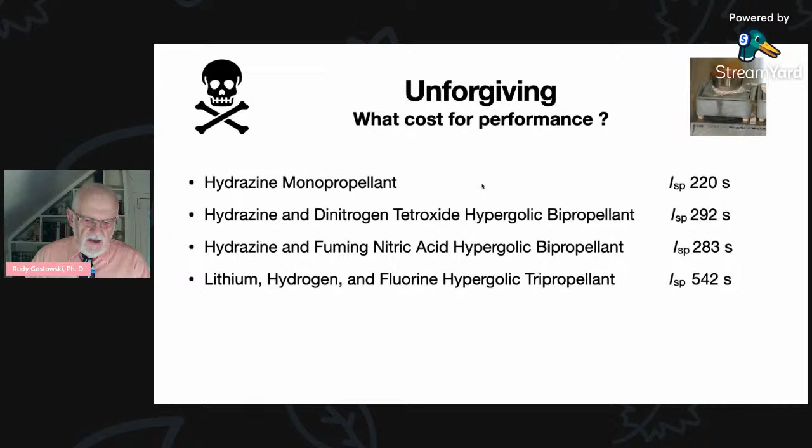So if we're just thinking about that performance number, we'll neglect these other things. And so that's why I'm talking about this today. So we have to make trade-offs in any selection. We have to do a trade study. We cannot have it all.

And in spite of one of the NASA administrators from, I don't know, four or five administrators back, who said we could do everything at the same time. We could be faster, we could be cheaper, we could have higher performance, all at the same time, but it's impossible. And the man, he was an engineer, and he knew better. It was politically expedient to say something like that.

So if you're going to have performance, you're going to impact your handling safety, your environmental impact. If we consider the environmental impact, we may have to accept a lower performance. We cannot have all of these. There will be a trade study, a trade-off.

So what's the holy grail of green propellants? Well, we would say, okay, it's hydrogen and oxygen. We're producing water. How much more innocuous could it be to make water? And we get a fabulous ISP, actually the highest ISP that we've actually used, of 450 seconds. However, liquid hydrogen and liquid oxygen have their own challenges. They are not as dense as we would like. They're cryogenic, and they give us tremendous technical challenges. They combust at a very high temperature.

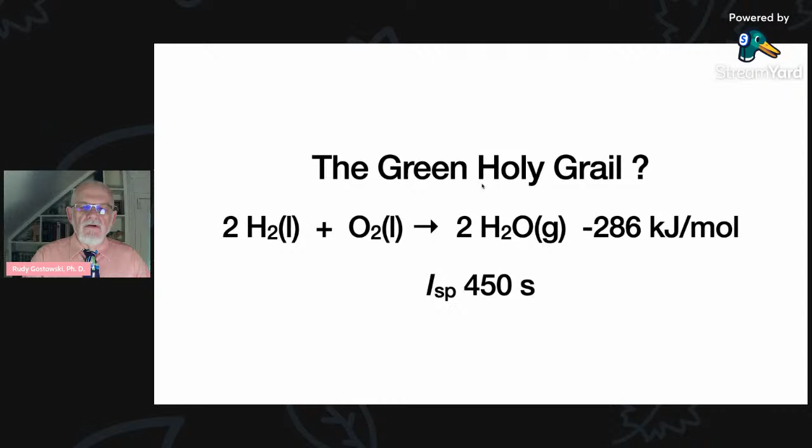And I'm also going to talk about what I'm going to call pseudo-green propellants. These are not really green. They are going to pollute. They do not have the handling considerations of some of these things, such as hydrazine and dinitrogen tetroxide, but they do pollute. So I'll call that pseudo-green. It's not really green, but we're going to still talk about that. Or to have a quote here, you must break a few eggs to make an omelet. We're going to have to do some things to get a certain amount of performance.

So what are our options? Well, here's a list that I put together. I'm sure that I have omitted something. I'm sure those will come up in the questions, and maybe I'll have an answer. I don't know. Hydrogen peroxide as a monopropellant does not perform real well, but it has been used in many vehicles, and we'll see that a little bit later on. But it only has an ISP of 117 seconds. So it's a low performer.

Nitrous oxide is a better performer, but unfortunately many people think that it's totally safe, that you can do anything you want with it. In fact, automobile or motorcycle enthusiasts will install a nitrous oxide tank in their vehicle, hide it away, have a secret switch. They turn the switch on, and all of a sudden their engine's performance is doubled. Of course, it's probably going to destroy the engine eventually, but it will increase their performance momentarily. The hobby rocketry people use nitrous oxide, but there are some possible dangers when you scale up.

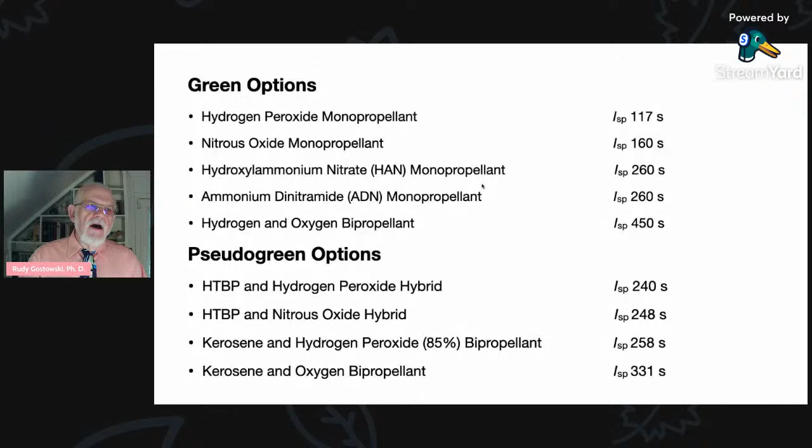SpaceShipTwo uses nitrous oxide, and they had a major accident when they were doing some ground testing, and it was partly that the technicians were not following the safety protocol, and the engineers had not considered the consequences of their design. And we were involved in that investigation. I probably should say no more at the risk of being sued by Sir Branson.

Another green option would be the HAN monopropellant, hydroxylammonium nitrate, and it has a great ISP at 260 because it's essentially a bipropellant that's together. And the problem that we're going to get into there, and also with the ADN monopropellant, ammonium dinitramide, I'm sorry, I'm butchering my organic chemistry this morning.

The problem with either of these is that they combust at a very high temperature, and a catalyst is required for their ignition. And it's very difficult, very challenging to find a catalyst support that can sustain that high temperature for any time. And that was something I was working on for these propellants when I was at NASA. And we weren't getting a whole lot of traction in doing that. It's difficult. And then the hydrogen oxygen bipropellant, you know, the holy grail of green propellants.

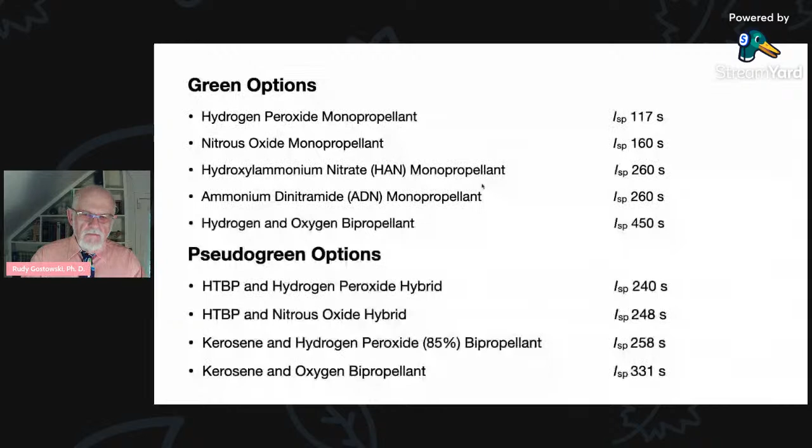So I'm going to spend most of my time, in fact, I'm really going to spend the bulk of my time now that's remaining, talking about hydrogen peroxide, because that's what I've had the most personal experience with, and that's what I think is a good place to go for people like yourselves that are wanting to have a sounding rocket, for us that want to have a sounding rocket. I think it's a practical way to go.

I believe it is attainable for us to build a hydrogen peroxide with kerosene bipropellant engine, maybe starting like what we're doing with a hydrogen peroxide thruster and gradually working our way into it, because it's a challenge to even make the thruster. We have to do that correctly.

Some relevant characteristics of hydrogen peroxide: it decomposes to oxygen and water, so it's not going to have any environmental impact, and it's not going to be toxic to the people that are handling it once it's decomposed. Now, you certainly do not want to drink hydrogen peroxide. You know, that would certainly kill you. And it does have some handling considerations that we'll talk about a little bit later on.

But in that decomposition, it's exothermic by 196 kilojoules per mole. And we can accelerate the rate at which hydrogen peroxide decomposes with different things such as metals, elevated temperature. So once we get something started, it's going to be self-sustaining because of the heat. In fact, that becomes a concern because of heat soak back into the piping to the engine. It could cause a problem at a valve or at a tank that's

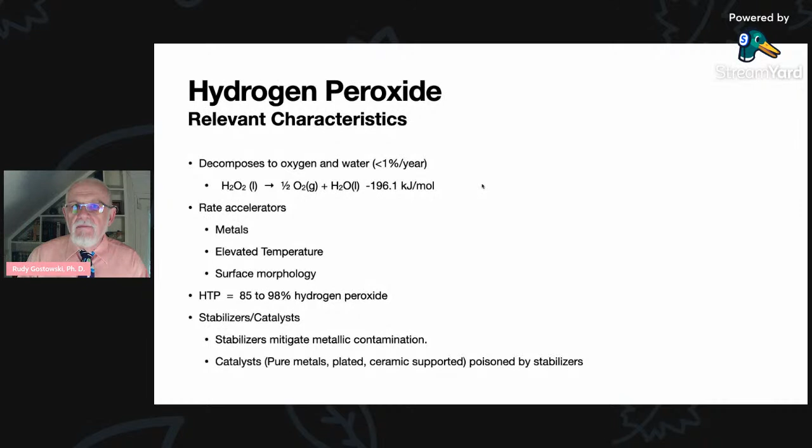The advantages of peroxide: safer handling, much safer. We don't have a cryogen. We don't have to be concerned about having a frostbite burn to our hands if we were to pour it on us. There's no cryogenic requirements. You don't have to worry about boil off. The decomposition products are totally safe. You can have a smaller vehicle because of a lean burn mixture. You have cooler combustion than many combinations. Hybrid engines are more stable with peroxide than using LOX, and it's pretty cheap.

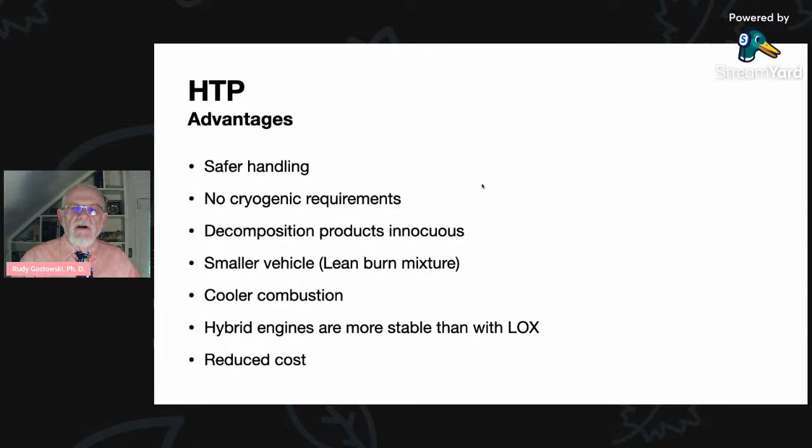You know, you can buy peroxide at a 35% concentration level, and then you can increase its concentration by removing the water. It's not a difficult thing to do. It's dangerous, but it's not difficult to do.

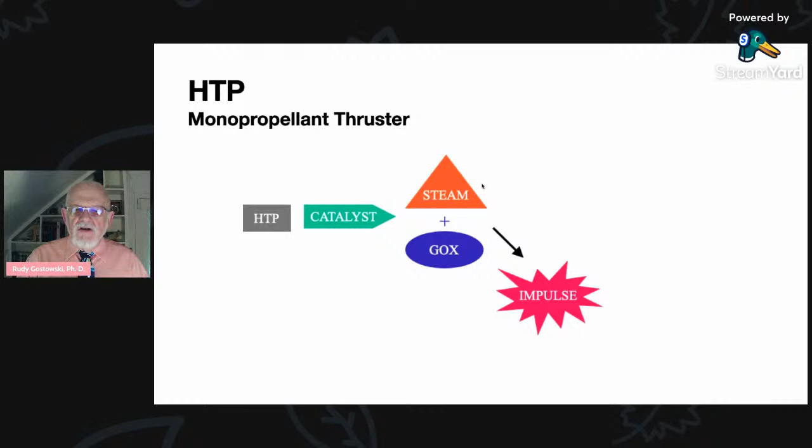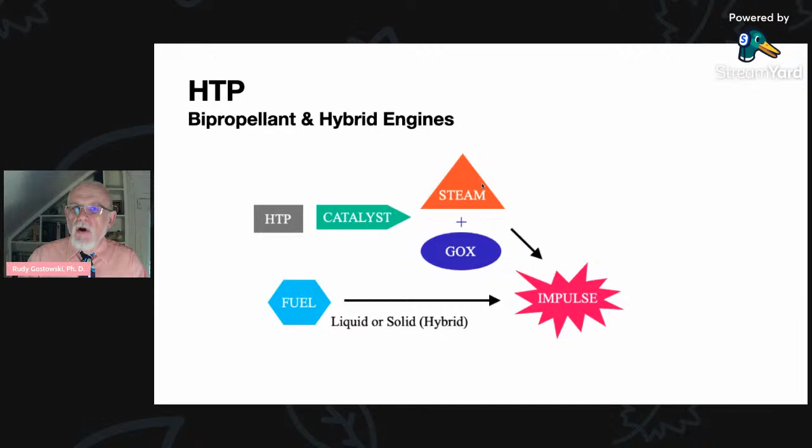So some of the applications of peroxide: we've already talked about the monopropellant thruster, where the peroxide encounters a catalyst, producing steam and gaseous oxygen and giving you your impulse for your rocket. Or you have a bipropellant or a hybrid mode where we're using the gaseous oxygen to burn with a fuel. That fuel could be a liquid or it could be a solid in the case of a hybrid. And the steam can actually cause the combustion event to occur if we have a flame holder present in our engine.

So it's a heritage propellant, meaning it's been used many times. It was the initial liquid propellant. It was what was used by von Braun in Germany.

So it was used in the X-1, the X-15, in their reaction control systems, the Mercury capsule, Soyuz capsule, Progress, all these different rockets and capsules and rocket planes used it to control the attitude of the rocket plane or whatever it was. It was used as a liquid bipropellant in the British Black Knight project, the AR-2, the LR-40,

that was in Russia. It's been used in hybrid. There was a large hybrid rocket using peroxide by General Electric. It's been used to run turbopumps in the V2 and other rockets. It's been used in torpedoes, submarines, the JATO pack that we attach to an aircraft so that it could take off on a short runway.

What I'm going to talk about now is the X-37 project. I was involved in X-37. Besides my work with the shuttle boosters, my other major project for NASA in the beginning was the X-37. And we worked on that for several years.

Excuse me, I'm going to grab a drink real quick. If you want me to talk about roasting coffee, I can do that sometime too.

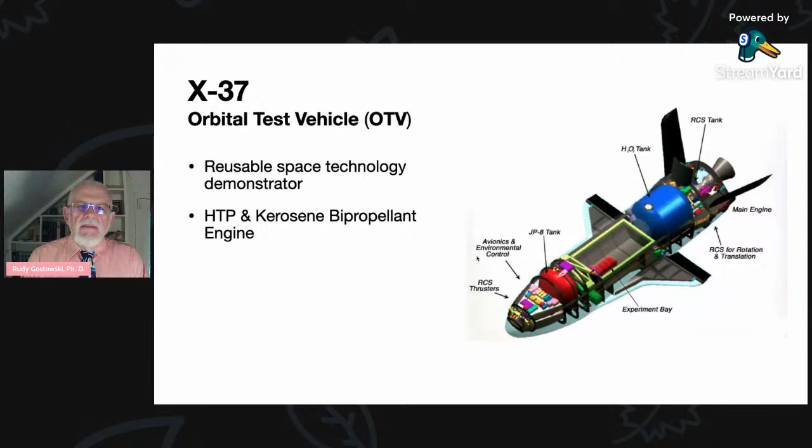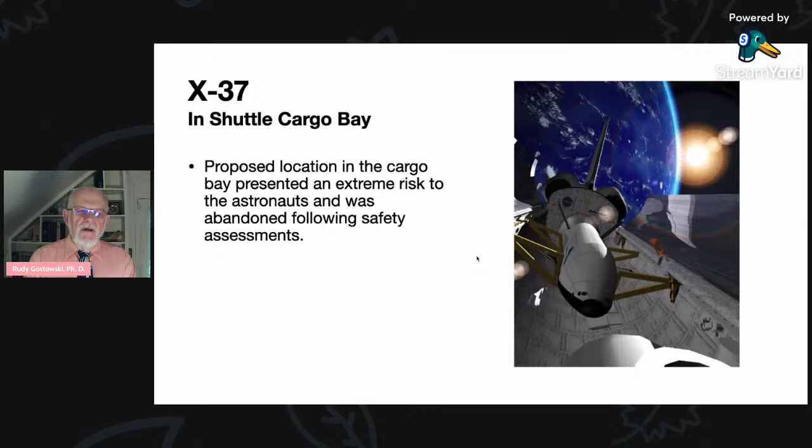And the concept was to put it in the shuttle bay, fly it up, and then release it and fly it back to Earth using that bipropellant engine. And as soon as I saw this, I thought, this may not be such a great idea, because the proposed location in the cargo bay presented an extreme risk to the astronauts in the shuttle and was eventually abandoned following safety assessments. And I was partly responsible for that, along with a gentleman named Alvin Edson at Marshall Space Flight Center.

So now I want to talk about material compatibility. That's what I did mostly, was look at the compatibility between peroxide and the materials that are used in the propulsion system, because this is going to affect performance and safety and that sort of thing. So prior to NASA doing this, there were use recommendations that came from the 1940s and 50s. And the recommendation was to use what was called Class 1 or Class 2 materials, which would be glass. You can't use that in the propulsion system.

Or use alloys of aluminum, such as 5254, 6061. Those are commonly attainable. You could use stainless, well, the 300 series, so like 316. Teflon is fine. The other things were to avoid contamination, gross and otherwise, because even lower contamination will eventually cause a problem. You can add stabilizers, but it may have problems, and provide proper venting and pressure release should you have an overpressure event. And this rating system is given here as to how this worked.

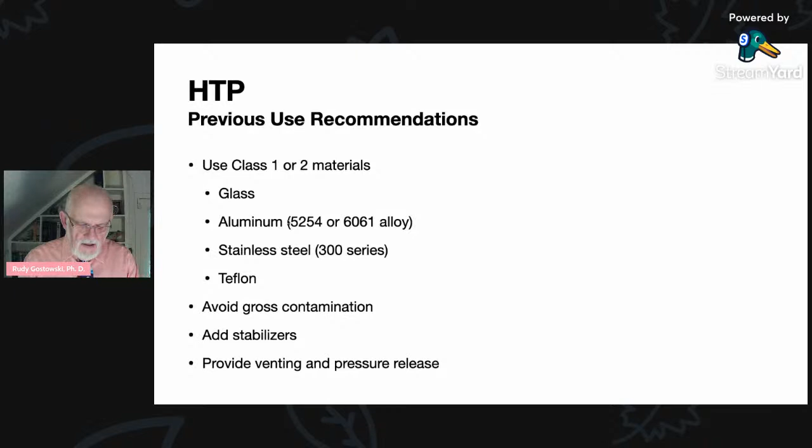Class 1 materials are highly compatible, can be used for long-term storage. So that would be something like glass and pure aluminum, not an alloy, but pure aluminum would be a Class 1. Then Class 2 materials are satisfactory for short-term contact. So that could be in your tankage and piping in the vehicle. So we can have it loaded for 1 week at ambient temperature and be okay. And then materials for short-term contact, that might be in the actual engine where it's only going to see that for a brief time. And then Class 4 would not be recommended in any case because those are essentially catalytic materials.

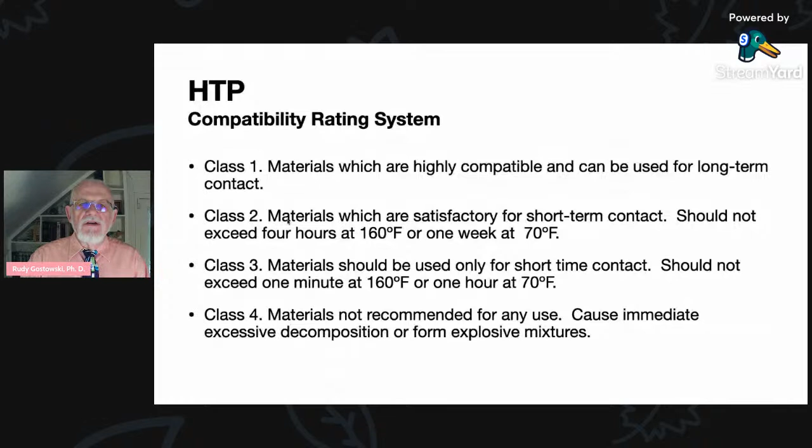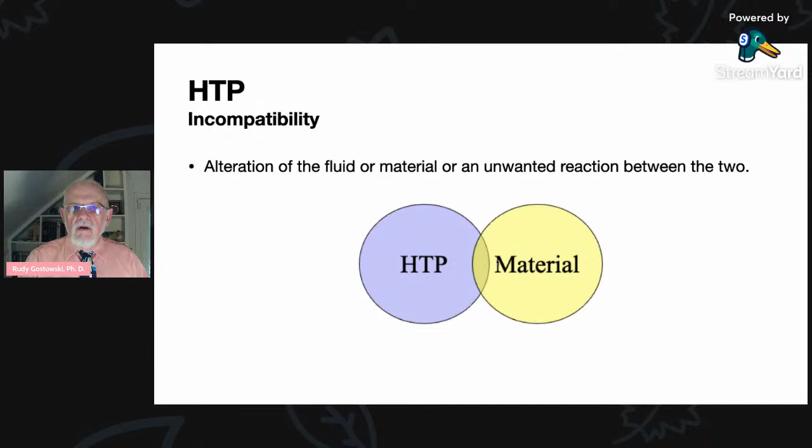When we talk about incompatibility, we're looking at the interface in this Venn diagram between the peroxide and the material. And we're just concerned with what's going to go on here. And it could result in either an alteration of the peroxide, in other words, the fluid, or it could cause an alteration in the material that's contacting it, or it could cause a reaction between the two, causing an overpressure event or a temperature rise.

So we need to understand compatibility at all the levels, at the molecular level, the level of a sample coupon of the material. Then we need to consider what's going to happen in our component, say a valve or a piece of tubing or something like that, a temperature sensor, all those sorts of things. I've been stewing over that some on what we're doing right now at the school as far as compatibility with temperature sensors and pressure sensors.

Because it's difficult to find something that's going to be workable. And then we have to look at the entire system. We put the entire system together. We load it with peroxide. We monitor the temperature. We have no intention of firing the propulsion system at that time. We're just looking to see, does the pressure go up in and of itself without the peroxide encountering a catalyst? So we need to make sure that all of that is working correctly.

So ways of increasing compatibility. Surface treatment. This was discussed on Friday in reference to dinitrogen tetroxide. It would also apply to fuming nitric acid. First thing would be to make sure everything's clean so that we are removing our gross contamination. That would be something as simple as using a detergent, a surfactant, to remove any oily organic material. Organic material is extremely concerning. Definitely do not want anything that came from the machining of the part to still be present whenever it's going to see peroxide. That would definitely cause a problem.

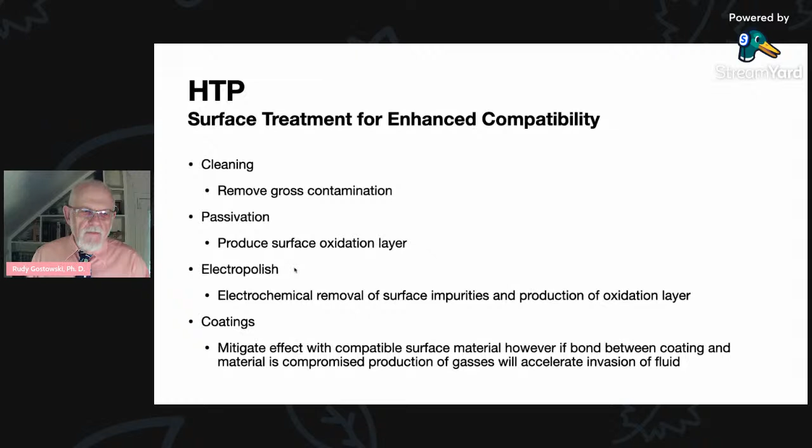So here's some of our crew safety and mission success concerns with peroxide, because it's always a trade-off. There is no perfectly safe propulsion system. Well, electric propulsion, from what we saw, is safe, but you can't get to orbit that way. Have a vapor phase explosion, compression detonation. That sounds terrible, right? Excessive pressure and temperature rise within the system during your mission. You can lose mechanical properties such as strength, elasticity. Can have components swelling when they're exposed to peroxide. And then you could have flammability concerns and impact sensitivity. In other words, if we strike that metal, is it going to start an ignition event?

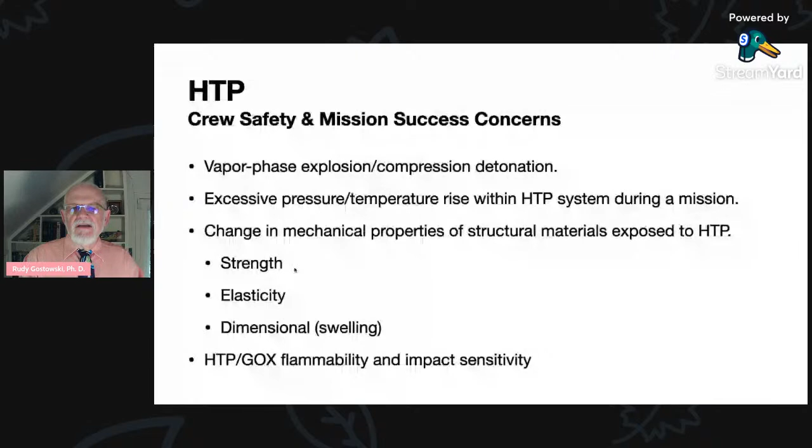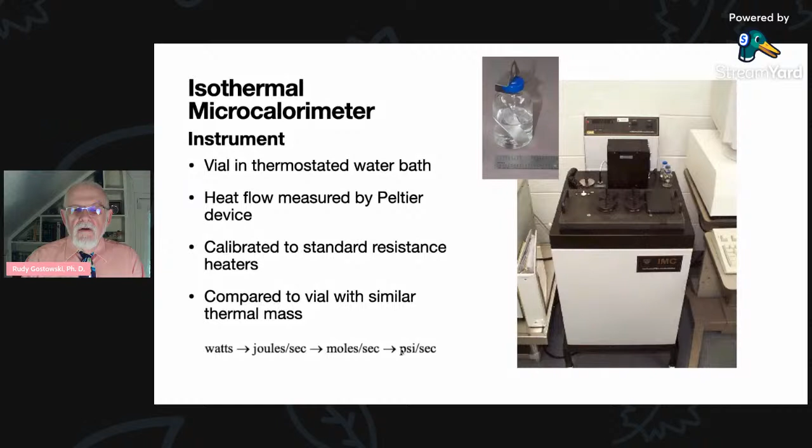And we compare a sample vial to something of similar thermal mass, because the whole measurement that we're taking is a comparison. And then we can do this kind of conversion where we take the watts, convert it into joules per second. So now we're into a rate. Then we're looking at moles per second. Now we're definitely into the kinetic domain. And then we can get into the engineering domain of pressure per second, pressure rise per second because of decomposition.

So this is your typical data here. So I've got energy on the y-axis, and this is the watts, and of course we would have to do the conversions to get to pressure. On the x-axis we have time, and for compatible materials such as this A286, nickel 200, and the CRES 347, they were pretty compatible. You can see these are approaching flatline, especially A286, where Inconel was really terrible. And this is the typical results that we were getting.

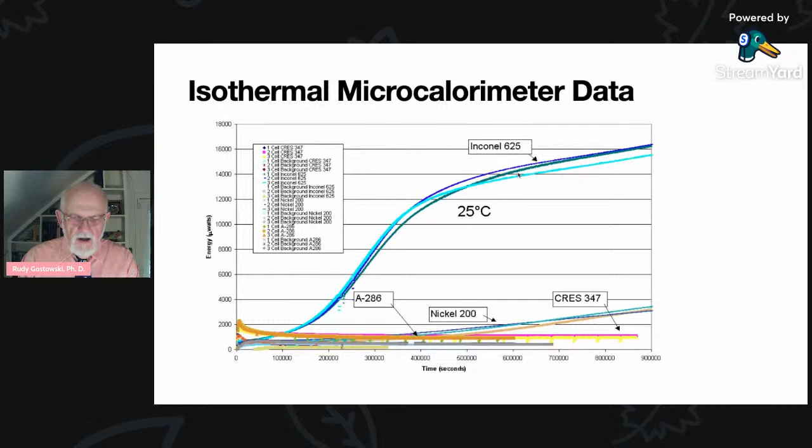Another way to measure compatibilities is with gas evolution, where we're deliberately causing the peroxide to decompose, and then we're seeing, well, how fast do we accelerate the decomposition by putting in a sample coupon of the material that we want to investigate. So we have that sample coupon inside a vial containing peroxide, have a Teflon tube that's going over through a water bath into an inverted burette.

And we're displacing water. You've probably done this in a general chemistry lab when you were taking your chemistry classes, where you're displacing the water inside this glass tube or burette, and we could then measure how much we've accumulated. And then actually doing this over an extended time, when you get to a certain level of oxygen in here, you would then open this to vent it so you could start the process over again. The sample vial, as I said, was in an oven. The gases displaced the water in the burette, and then the gas volume was recorded at regular intervals.

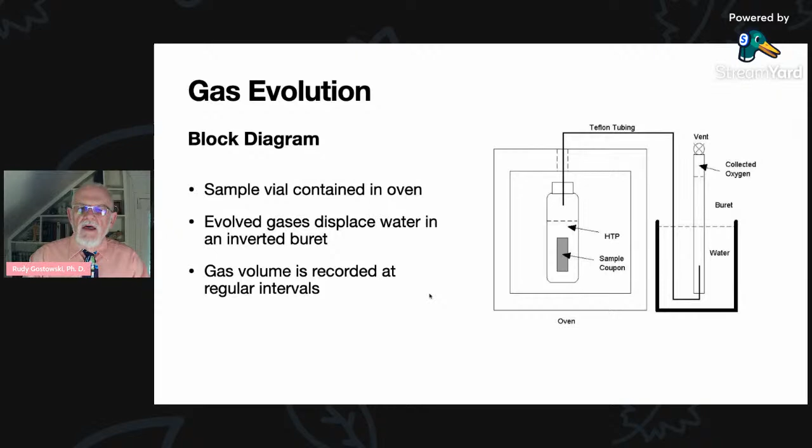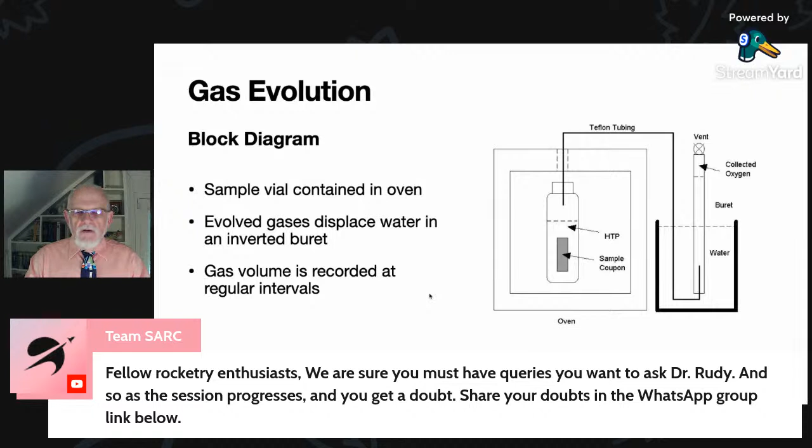So this was a great project for a student. I had an intern that was doing this over the summer, and then I loaned all the equipment to her and her chemistry professor back at her school, and she went back there and did those experiments. They presented this at a conference, had a paper from it, and she went on to working at Marshall Space Flight Center after she graduated.

And then a final way here, although there's certainly other ways, is what's called a heated bath. In this case, we have peroxide of a known concentration in the vials, and then we put samples in some of the vials. Those vials were passivated. They have a vented top. You can even see the hole here where they're vented.

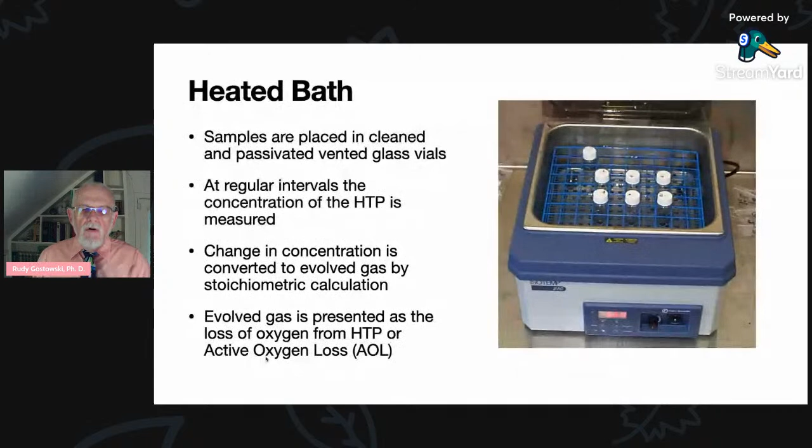At regular intervals, we measured the concentration of the peroxide that was there, and the changing concentrations converted to evolved gas. So we're converting peroxide into oxygen and also into water, and then we could do a stoichiometric calculation from that, and then the evolved gas is presented as the loss of oxygen from the hydrogen peroxide, which has an accepted term. It's called active oxygen loss, or AOL.

And here is a chart of AOL taken from this sort of data, where we have different alloys of aluminum. This is a Teflon-like material. That's a stainless there, 316. Here's 316 that was welded. I wanted to look and see how much welding changes the compatibility. You can see here very quickly that this is decomposing a lot faster because of the simple thing of having a weld.

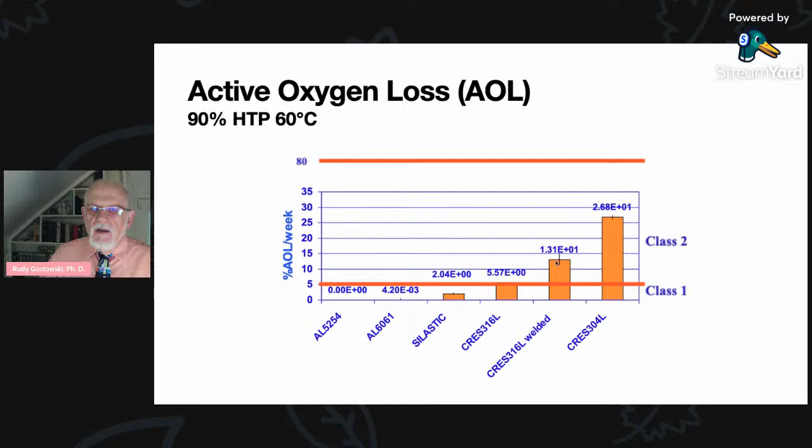I took samples of 316 stainless steel to a welder technician at Marshall, and he put welds in there, and then we cut them up into coupons and measured it. And I have a paper on that, and we speculate as to why it happened. It changes the initially homogeneous depositions of the crystals in the alloy into making them maybe more concentrated at the surface, and exposing less compatible parts of that steel alloy.

So moving on from here. Oh yeah, these are still class 1, class 2 materials. And as you can see, the aluminum and this particular Teflon are the only class 1s. The 316 approaches being class 1, and I consider it to be good enough. We just can't weld it. We have to find other ways of joining them besides welding.

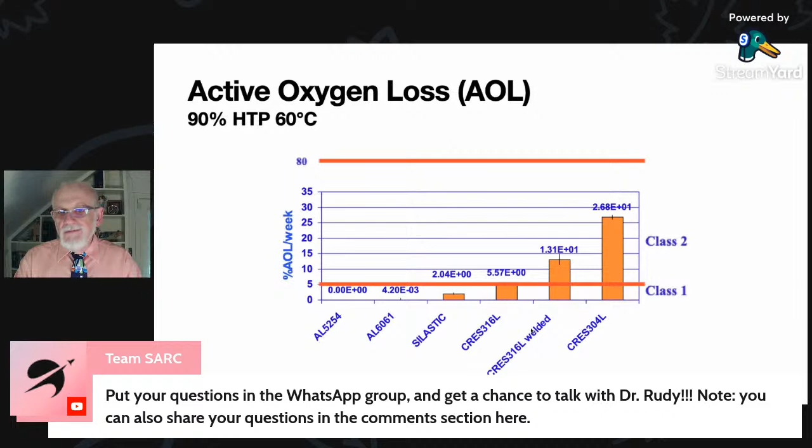Now, we can take those 3 ways of measuring compatibility, and we can see, do they agree with each other? Do we get the same result, whether we do a bath test or a gas evolution test or an isothermal microcalorimetry test? And if we convert to common units, do we get the same compatibility? And we should, no matter how we measure it.

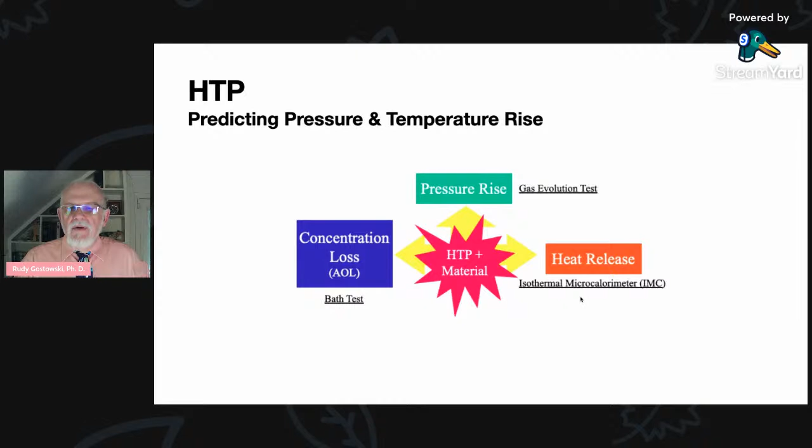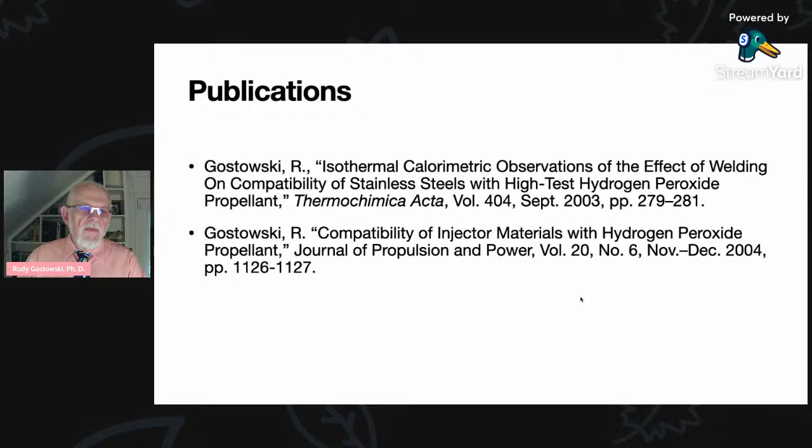So now I want to move on to hypergolic hydrogen peroxide, because initially it was thought that the only way to use peroxide really was to figure out how to make it hypergolic. Now, since that time, the discoveries have been made, especially by a research group in Korea, that you don't really need it to be made hypergolic, that you can just use the heat from the decomposition of the peroxide to cause the ignition to begin. So it's not really necessary, but we did some work on it. I want to share that with you.

And what happened was when they started pumping in the peroxide and the propellant, or the fuel, it did not ignite initially, and it accumulated in the engine. What they call pooling. It was making a pool of the two parts, and then it ignited and it blew up. But anyway, the lab scale experiment.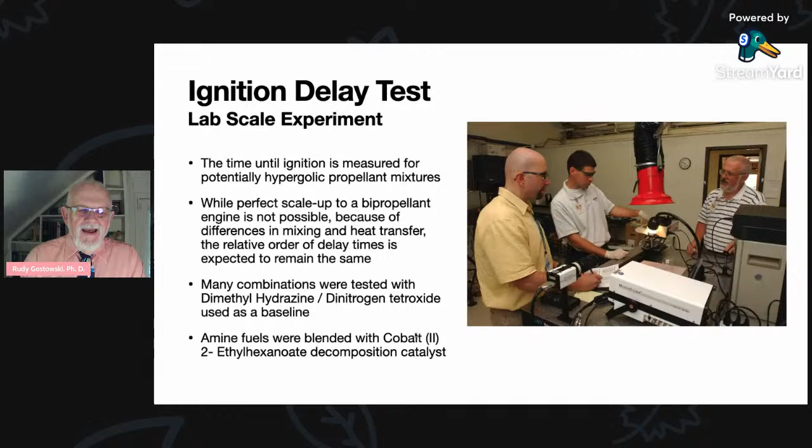So many combinations were tested. And we started out with dimethylhydrazine and dinitrogen tetroxide to use as a baseline because people already know in the engines what is the ignition delay. So we could then approximately come up with a multiplier and maybe make those comparable. So we were looking at fuels that were amines, and those were blended with a cobalt catalyst and made this purple fuel. And that's what I'm going to show you some pictures of here in a moment.

So this is the setup for it. During the initial test, it was determined that dropping the peroxide into a container of the fuel gave you the most consistent reproducible results. So a high-speed camera was triggered by a syringe pump. So here is our syringe pump, and it's pushing the plunger of a syringe forward. And then that is dropping the hydrogen peroxide down into a quartz cuvette that contained our fuel. We have our slow motion camera here that was collecting data.

We have an exhaust here to get rid of our toxic fumes, especially the hydrazine and nitrogen tetroxide was certainly hazardous. I've handled that stuff. It is bad, very dangerous. But anyway, the camera was activated when the syringe pump came on. The syringe pump was remotely activated from a computer. And the syringe pump yielded consistent drop size. So the drops that were going into the quartz cuvette were pretty close to being the same size. And that's essentially how it would work.

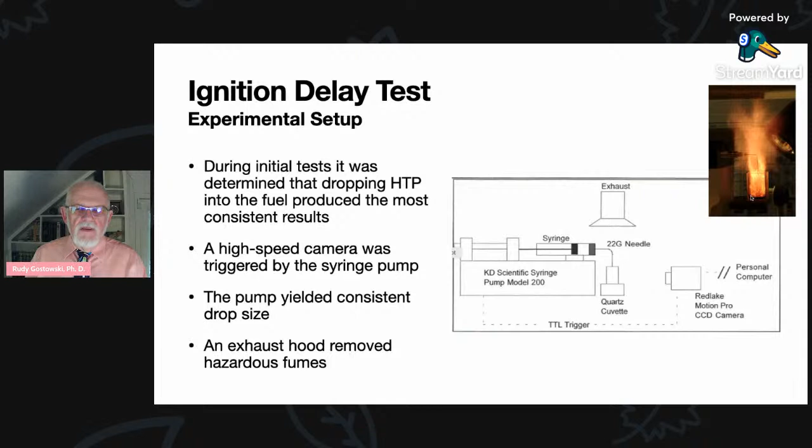And you can see over here, this picture was staged for this photograph. It did not make such a flame. We deliberately pumped in a lot of stuff really fast just to make a good picture. It's not the way we really did the experiments. They weren't that dramatic.

But now I'm going to do my own version of the slow motion. I'm taking slides that are occurring at the various time intervals, and I'm just going to advance them, and you'll be able to see what's happening. So you can see the drop has left the tip of the needle. So there's the needle, there's the drop, the fuel is down here. The vapor pressure is causing the fuel to rise up the sides of the cuvette, and then it's condensing and coming back down. So that's what this is. And here we go.

So that would have been a combustion event. And then to take it back to where we would take our times, at the point where the drop impinged on the fuel, that is time 0. We then continue on. You can see that there's some reaction happening. We would take either that slide or this slide to say this is the beginning of a reaction. You can see some vaporization occurring.

And then this point right here, oh, wait a minute, I think it was actually, yeah, I guess this was always hard to say. My colleague made the call on exactly when the ignition event was. I mean, certainly there's an ignition here. So I guess this would have been where we would have said you have the flame kernel beginning. And of course, there it's definitely going. And here's all those slides on one sheet here.

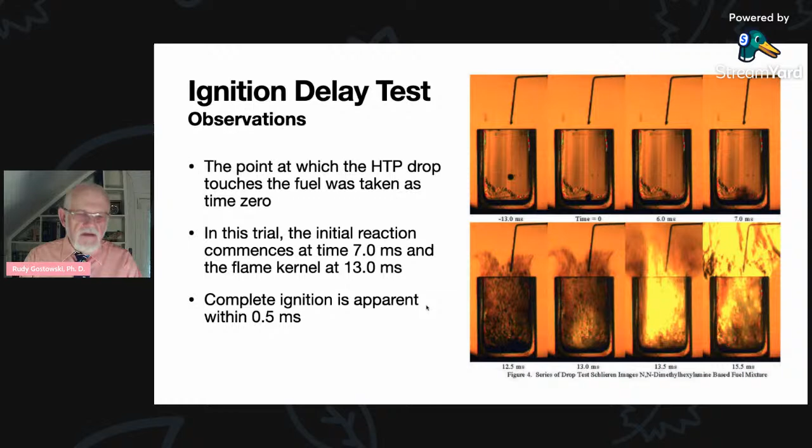So you can see again, the drop is time 0. The beginning of the reaction is somewhere between 6 and 7 milliseconds. And then we would say the flame kernel was at 13 milliseconds. So we'd say that the ignition delay time was 13 milliseconds in our experiment. And I've got the same information over here. And anyway, that's the way that experiment went. And then there's a publication of that.

The person that was running the entire project was John Blevins. He is currently the lead on the development of the, oh boy, now I won't be able to think of what it's supposed to be called, the propulsion system for the Artemis project, the return to the moon. He is the lead.

So now I want to talk about the robotic lunar lander. I did not exactly work on this. I was consulting because by this time I was no longer working for the agency. I had already moved to the college, but I came down at the invitation of Alvin Edson, the safety guy, because he wanted me to look at what they were doing and he wanted to discuss, is this going to be okay? So here is this thing.

So this is actually much smaller than this picture would have you think. It's probably maybe a meter long, but I think it's probably not quite that much. I think it might be 2/3 of a meter or something. But anyway, it flies autonomously. It's robotic. You have a central hydrogen peroxide monopropellant thruster that is offsetting gravity, so as to simulate a lunar environment where you would not have that gravity.

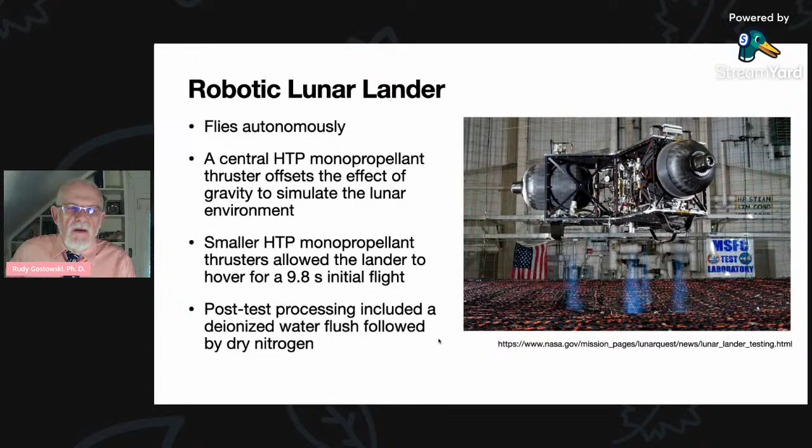So now I'm going to go into what we've been doing at Triton Fisk, the thruster development there. And this will be a few slides, but I hope you will let me know if I'm going way over time, because I've not been noticing.

So this was part of the NASA MINDS program, which is the Minority University Research and Education Project, or MUREP. This is in the Office of Education at headquarters. I knew the former director for MUREP. And so they're taking that as the M of the MINDS, and then the rest of it, Innovative New Designs for Space. I'm not going to talk about this. You can read this. It's just mainly going to minority serving institutions to give them an opportunity to work on a relevant project.

And so at the schools, we had design teams working on the 3 parts of the thruster, the nozzle, catalyst pack, and the test stand interface. So we had a team at Triton, a team at Fisk, and those are the various people. And I won't go through all the names because you don't know these people.

And then here are our mentors. I just want to give them some credit, especially Michelle Harton. She's an MIT graduate, electrical engineer, went on to be a math teacher because she wanted to do something that she felt was more meaningful, and I hope she will continue working with us.

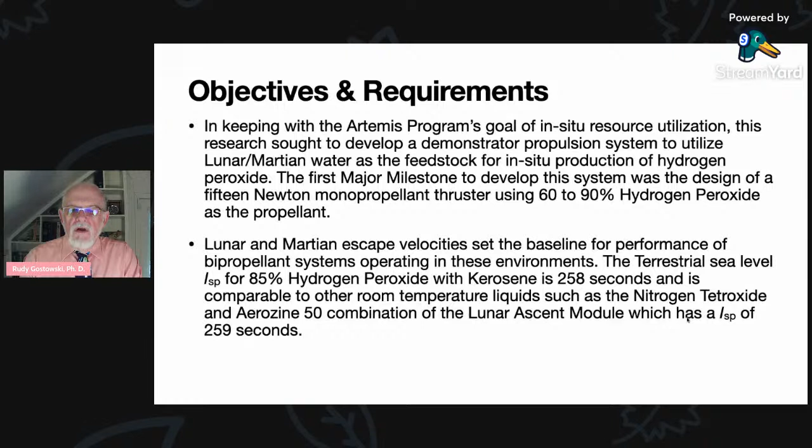Dr. Rogers, Steve Rogers, pointed out to me, well, for this to be feasible, can you get enough ISP to use this? And so we did a little looking and saw that hydrogen peroxide with kerosene, 258 seconds. And it's comparable to other room temperature liquids like nitrogen tetroxide and Aerozine combination. That's basically the lunar ascent module. And it's going to be easier to get off the surface of the moon than to get off the surface of Mars. So it would probably work.

So now we needed an inspiration. Because you remember when I was talking on Friday, a challenge, not a problem, in pursuing this as a career is being creative. And I'll admit I'm not creative. Partly because I don't possess the knowledge in all the areas that I should have. I've got some knowledge in engineering, but most of it is in chemistry.

So I found this article by Jo, An, Kim, Yoon and Kwon, I guess, from Republic of Korea. And they came up with a very clever design for a bipropellant hydrogen peroxide engine, where they're bringing the fuel, the kerosene, up this tube, and then it distributes from the center outward and comes out of these orifices here.

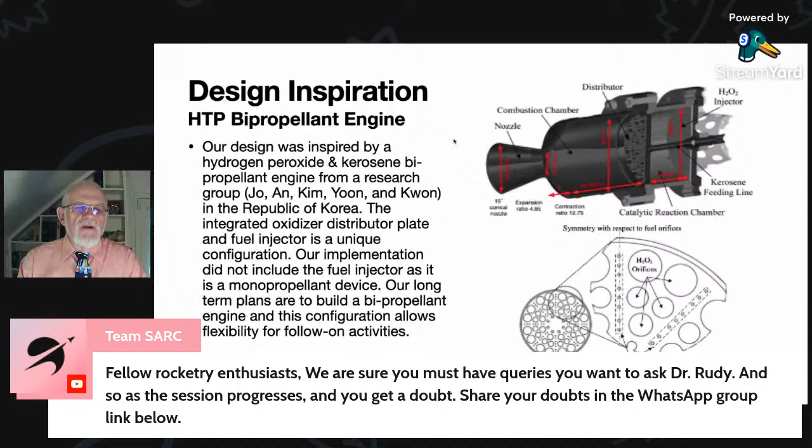And then in this area here is the catalyst, and the peroxide's coming in here, and then it's decomposing, making high temperature steam, so that when the oxygen with the high temperature steam encounters the kerosene, it ignites, and then we have a combustion chamber. So clever idea. So our design was inspired by that. And the integrated oxidizer distributor plate and fuel injector is a unique configuration. I've never seen this before.

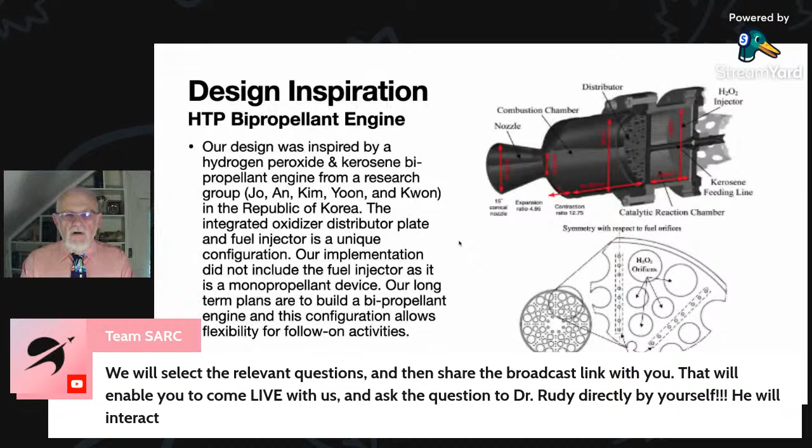They've gone on to do some other things where they're trying to throttle it in a way that's different than the normal throttling. But I won't go into that. I haven't read the article completely. But our implementation of this design inspiration was to not include the fuel injector because we're not making a bipropellant engine, we're making a monopropellant thruster.

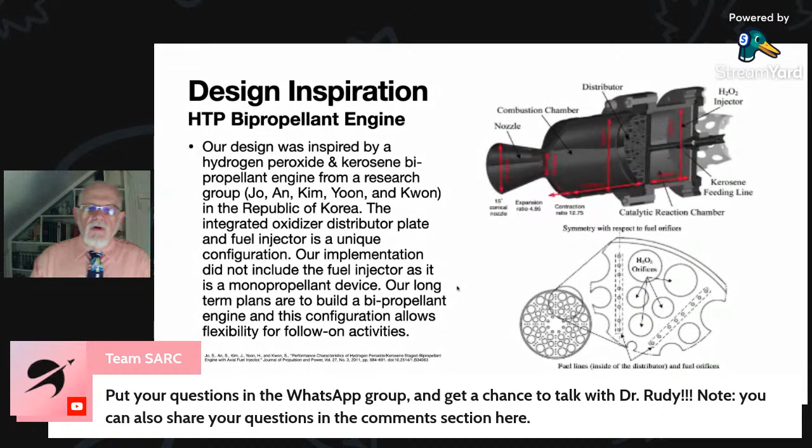But our long-term plans are to then eventually make a bipropellant engine, and so this makes it something that we can convert the thruster into the engine by changing this bulkhead plate and by adding on the combustion chamber. So that's why we did this.

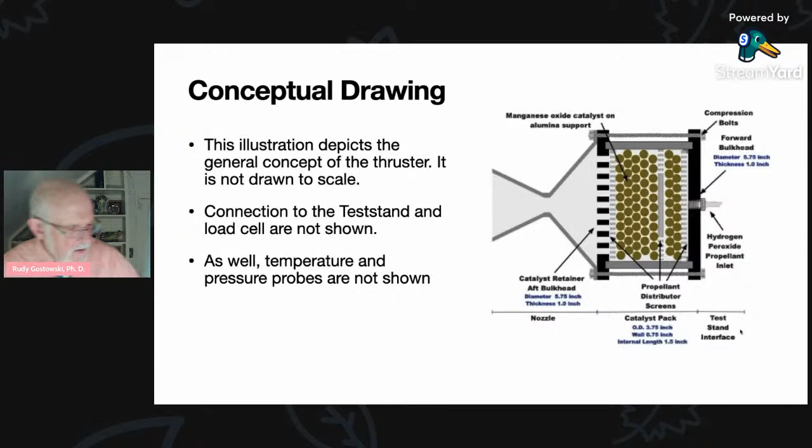So we put together a spreadsheet using a static condition to try to estimate the pressure. Found that really did not work well, so we wound up scrapping that and just using what other people have already found to be a typical pressure. We could estimate temperature from it, and that did agree with what other people were seeing as a likely temperature.

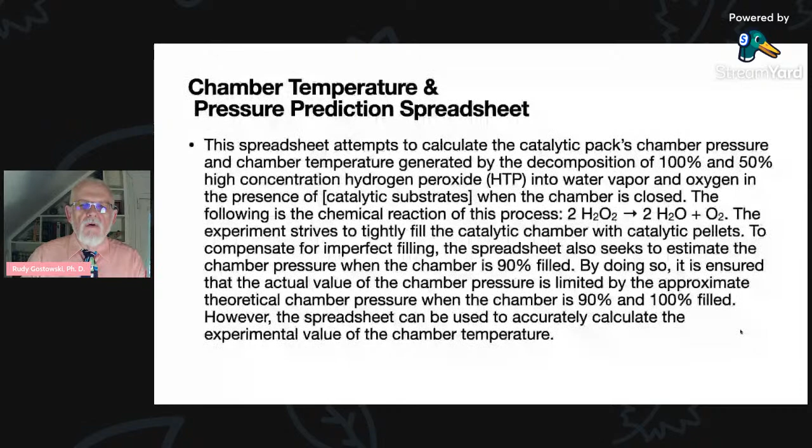So catalyst pack requirements and concerns. Besides containing the pressure of the steam and the oxygen at about 300 psi, it's got to be able to tolerate a temperature of around 1,000 Kelvin. And we need to allow close packing of the catalyst pellets. Catalyst pellets, I don't know if you can see these, but we're using zeolite to simulate the catalyst. That's not what we'll actually be using. We'll be using alumina pellets, and it would have manganese oxide on there as our catalytic material.

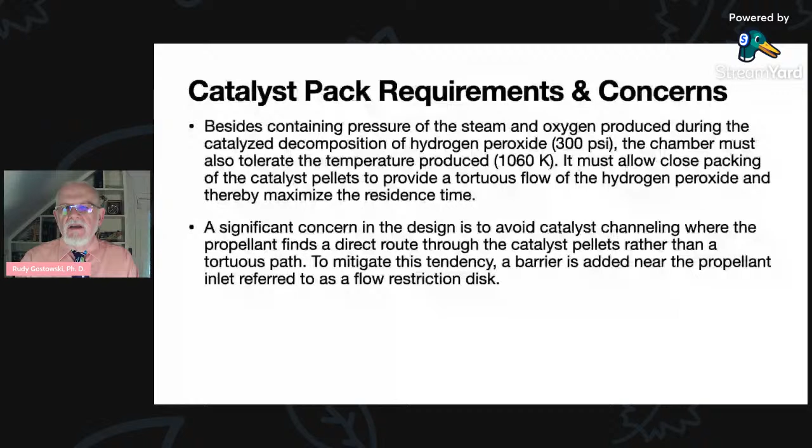But what we want to have is a tortuous flow path so that the hydrogen peroxide will have sufficient residence time in order to have the opportunity to completely decompose. So a significant concern in design is to avoid catalyst channeling. This is where the flow of the peroxide would make a straight path through the catalyst pack and not be in there long enough to totally decompose. So to mitigate that tendency, we were adding a barrier near the propellant inlet, and that's going to be referred to as a flow restriction disc, which is in this picture.

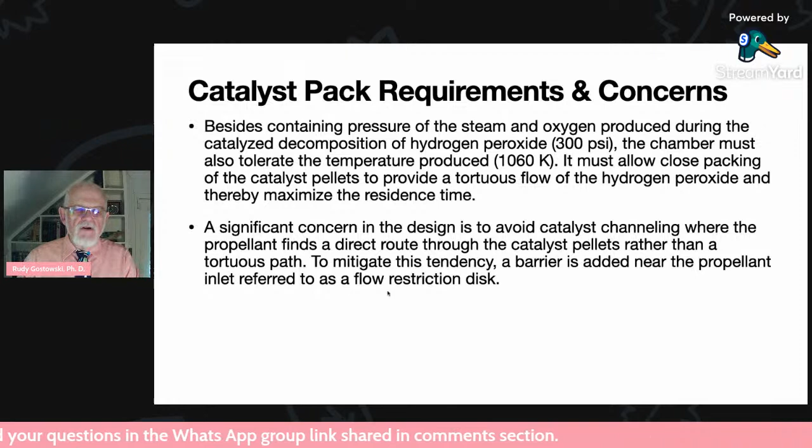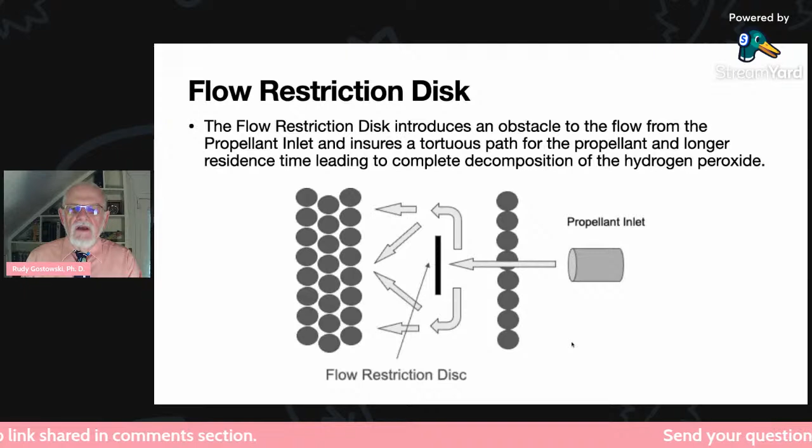So that when the peroxide comes in from the inlet, it would pass through some layers of catalyst, but then it would encounter a disc where the path would have to go perpendicular to the initial flow, and then hopefully it would distribute from there. Now that's one possible way of doing this. We could go with multiple inlets. There's other ways we could maybe handle this. But anyways, something does have to be done to try to create that tortuous path, increase residence time.

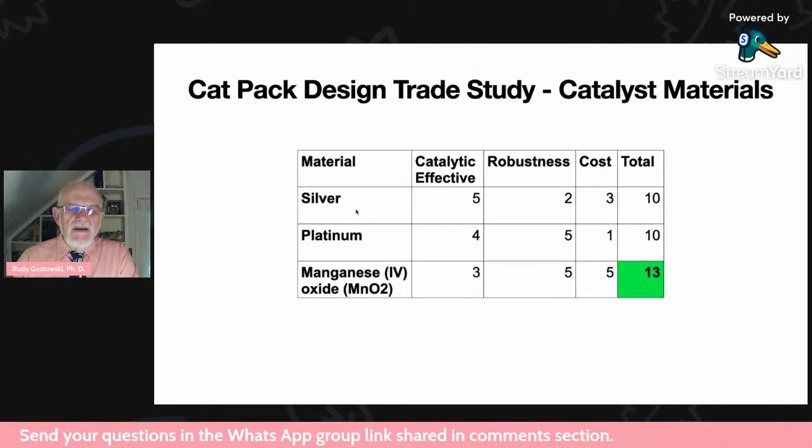So we did some trade studies on the materials we were going to use for the decomposition. Catalyst, manganese oxide certainly won out. It's not as effective as silver or platinum, but it's very robust and it's very cheap. So those are important to us. We do not want to buy silver and platinum. It's too expensive. Then we were doing something similar for our chamber materials, although we only looked at stainless steel, so not a really valid trade study.

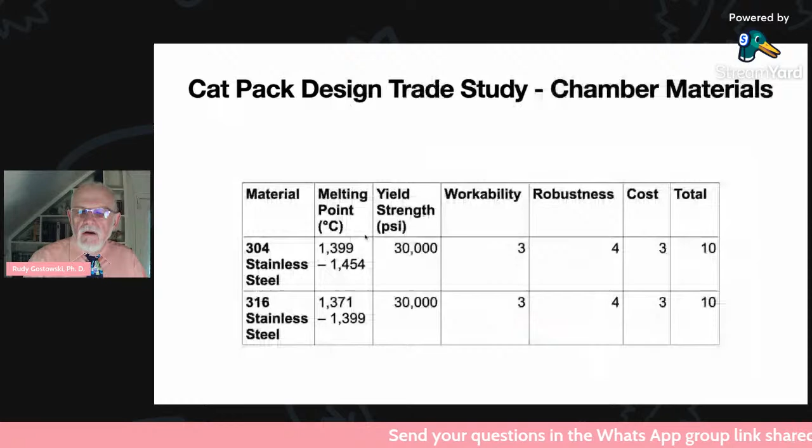Then we did a trade study on the retainer screens, because we have to keep the catalyst pellets from exiting out one of the plates, and I don't have one here. I should have. Excuse me. No, I don't have one, so sorry. Anyway, we don't want the catalyst getting out of the holes. I can go back to that picture, though. I'm talking about these holes here. We do not want the catalyst pushing through that or pushing through here. So we had to block that, and that was blocked with a screen-like material.

So what do we use for a screen? Well, we're initially going to be using stainless steel, but an interesting idea is to use manganese screen, because we'll have an oxidation layer on the screen, which would make the screen serve as a catalyst also. So it's scoring higher in our trade study. Now, the highest score was for the silver, but its robustness is so poor, and the safety concerns that you would have present would exclude that from serious consideration. And platinum is just too expensive.

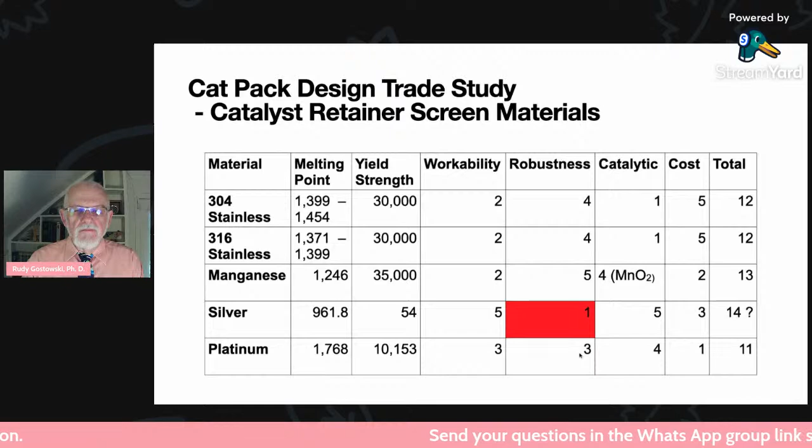So some other things that we were thinking about, safety concerns and mitigations: besides maintaining an adequate design margin with respect to pressure and temperature, and induced stress in the chamber wall, heat soak back resulting in explosive autocatalytic decomposition must be considered. And we're talking about premature decomposition, mitigations to avoid those things. Use a 1.5 design margin for the pressure, and then let's see what else.

Going to have a default-to-closed poppet valve where the propellant's coming in. So the valve out here would be a poppet valve that if we lost control voltage, it would close. And then there'll also be a main propellant valve that we could shut down also. And all wetted material is going to be considered for compatibility and should be a class 1 or class 2 material. Probably can't do class 1, probably be class 2.

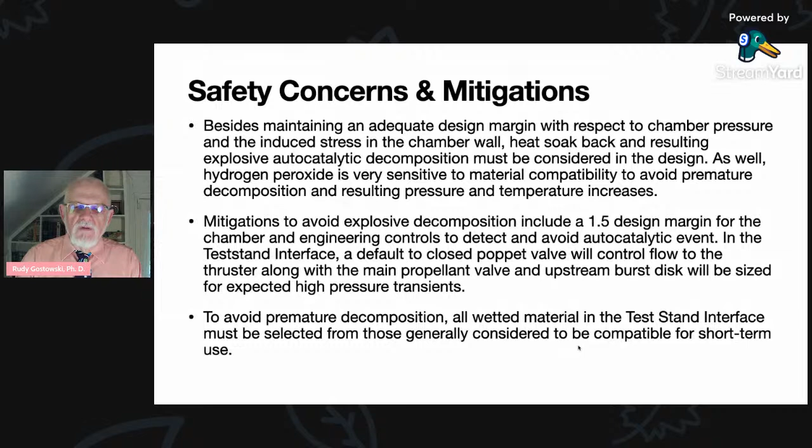So the nozzle design process. But before I go into this, what we're actually going to do is just produce the catalyst pack like this without a nozzle. Oh, I should have shown you. There you go. There's the holes for where the steam and oxygen is coming out. We want to build this first and test it and have this totally open so as to not have any concerns with overpressurization. And then we'll gradually block this off and try to get a good estimate of what is our pressure inside the catalyst pack.

And then when we really know what the pressure is, we can design the nozzle better, because we have to design it to that. Because in this version of it, we're saying, okay, the chamber pressure is 300. We have to couple it to atmospheric pressure. And also along with that, we're accelerating the particles to produce the thrust.

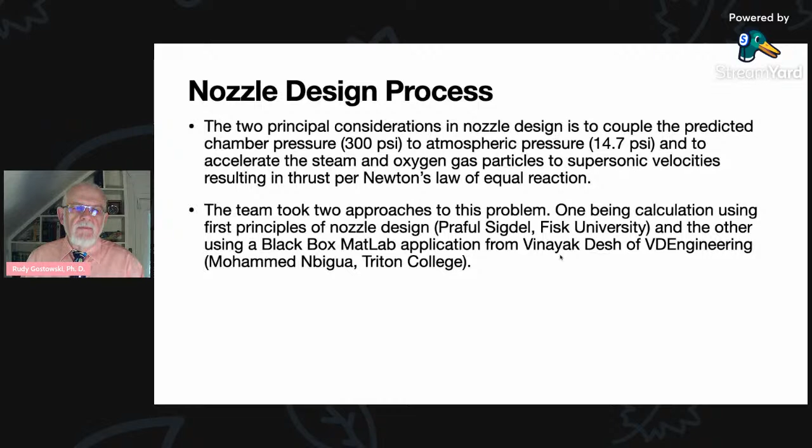Okay, so there were 2 approaches taken. Praful at Fisk University was using first principles, and at Triton we were using a black box MATLAB application that was written by Vinayak Desh, and it turned out it did not work for us. Now, he was too busy with his graduate work to look at what we were doing to help us understand why it wasn't working. So we'll go back and revisit that. But here is the first principles approach.

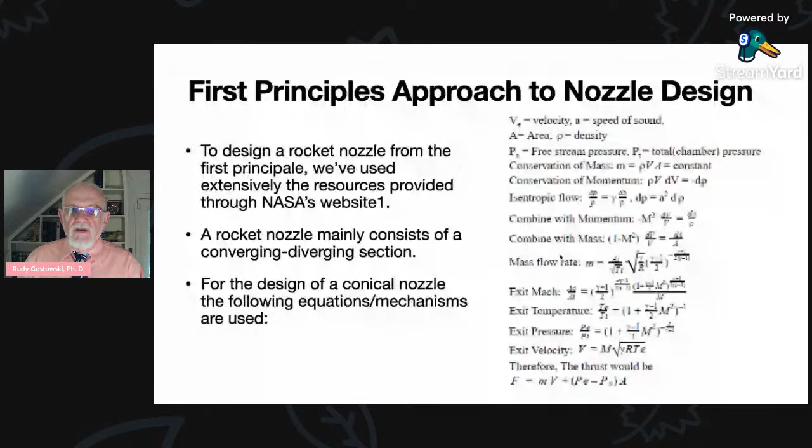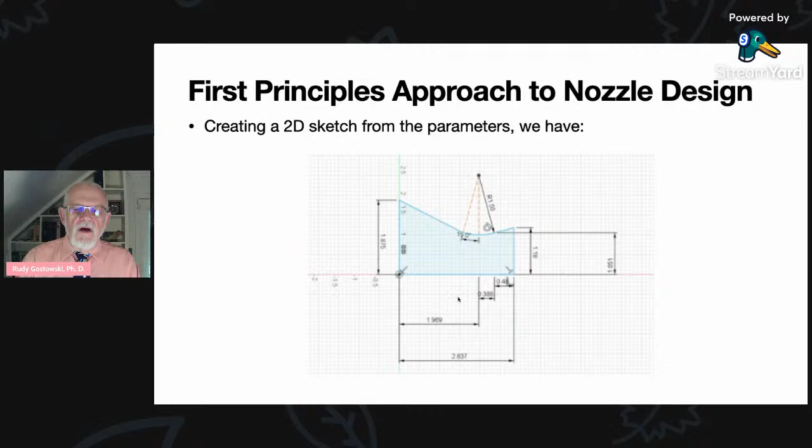This was from Mr. Praful at Fisk. And I'm not going to go through all this stuff. I don't really understand it that well. So I'll just leave it to you folks that want to read through all of this. But this is what it resulted in: a 2-dimensional sketch of our nozzle, assuming 300 psi, going to atmospheric pressure. And so it's just 1/2 of the nozzle 2-dimensional drawing. We could then rotate around that, producing a 3-dimensional object, which is what we're seeing here and what you're seeing here.

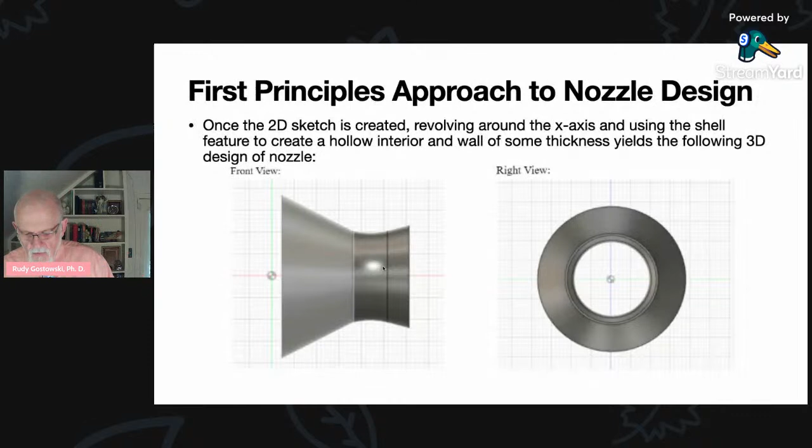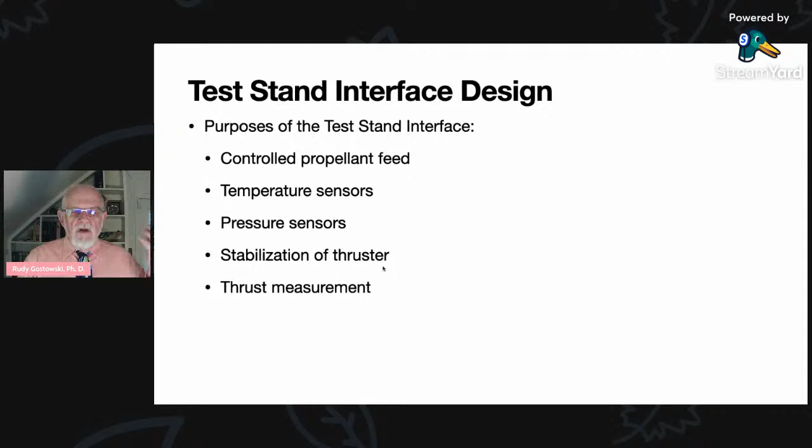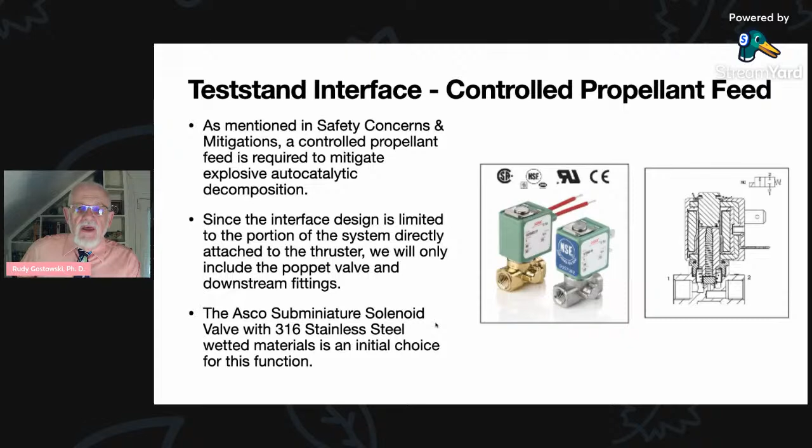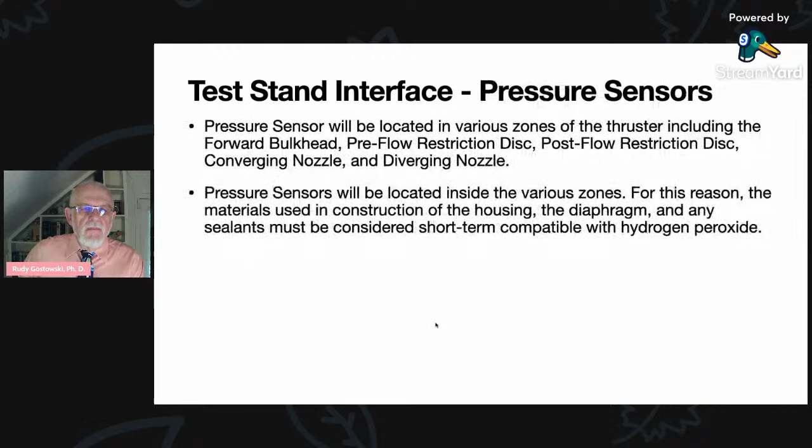Okay, then we're going to need temperature sensors put in various regions. Again, we do not know what temperature sensors we'll be using. They just have to be compatible with peroxide. And then pressure sensors, the same thing. And then I already talked about that. I don't want to stay here too long. We'll use a piezoelectric compression load cell to measure the thrust. We're looking for 15 newtons.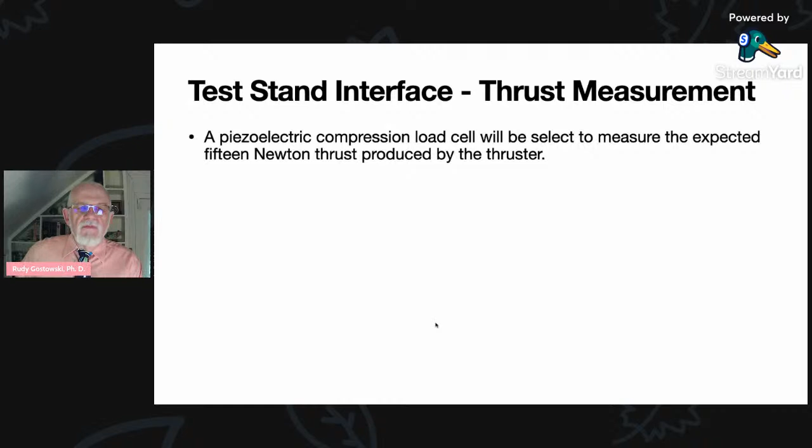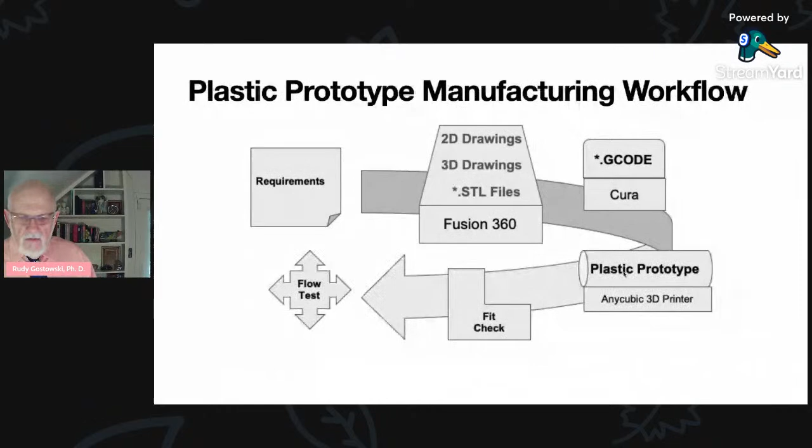So this is how we made these things. So we started out with our requirements. We were able to use Fusion 360, which you have had a workshop in how to use, giving you two-dimensional drawings, three-dimensional drawings, and then those could be converted to STL files, which can then be brought to software. This is your slicer software for your 3D printer. Cura is one of those possible options. It produces what's called G-code extension files. Those are given to a 3D printer, which is then going to make the plastic prototype, and then we can do a fit check, and then we're going to eventually do a flow test to see how that worked out.

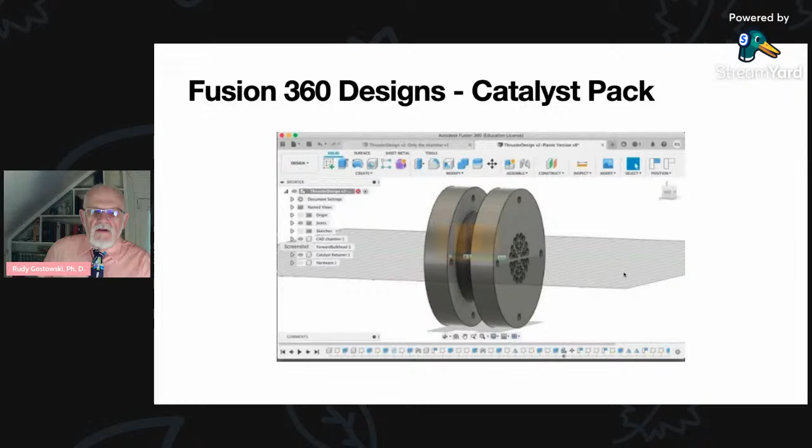And so, you guys already know about Fusion 360. I won't stay there. And then this is what we were getting from Fusion 360. So there's our catalyst pack part. There is our nozzle.

We can put those together, get the entire thruster. And then these are the parameters we used in the slicer. I'm not going to go through these really unless you have an interest in this. The one thing that we did play with is to make this more robust. Okay, I have to look at this one. I talked about this previously.

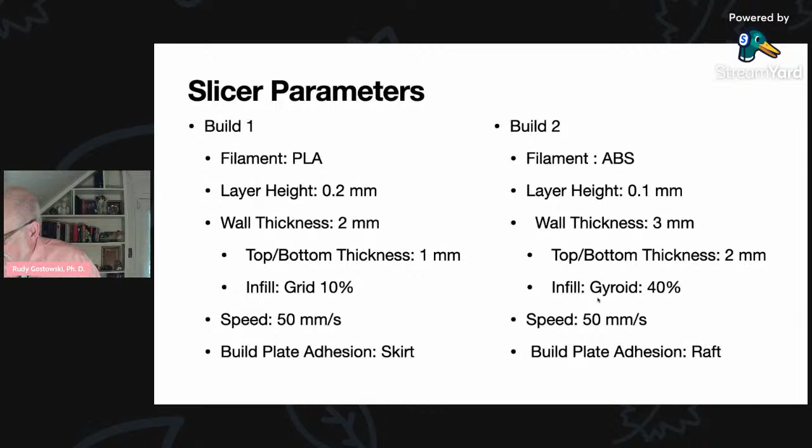If you can see inside here, I ran out of plastic, so I was not able to print the outer skin of this, so you can sort of see what the infill looks like. And there's different choices you can use for infill. So this is a grid like what we have here. The idea is the grid is only 10% of the volume inside, the other 90% is open. If you wanted to make this stronger, you could go with 40%, and you could change to a different infill pattern. And I wanted to play around with that.

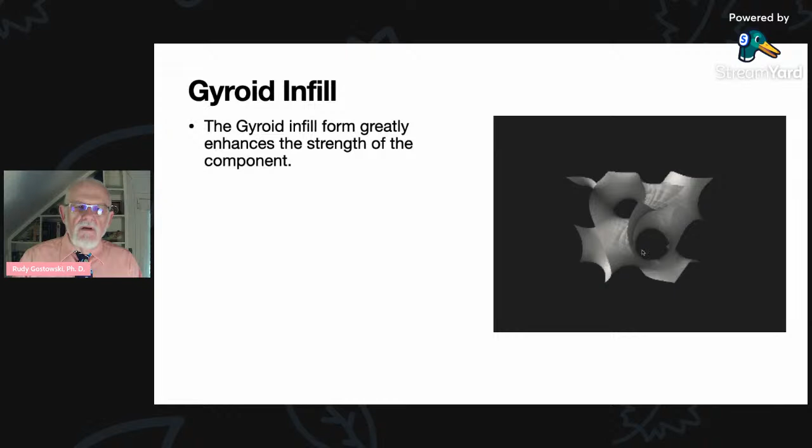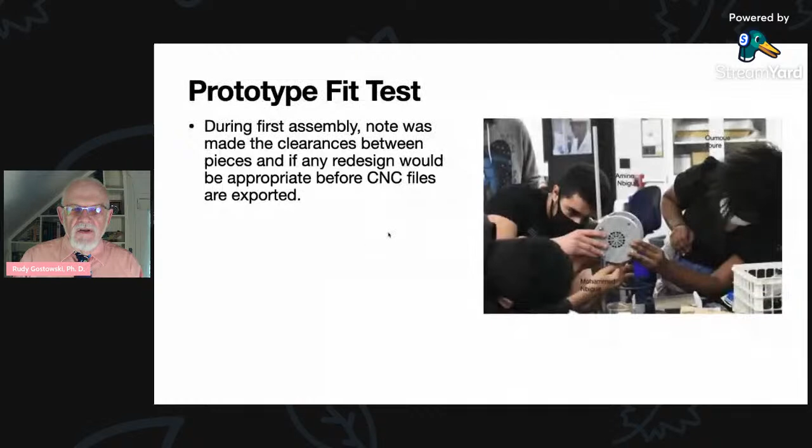So this is the gyroid infill type thing. You can see how these are going to connect with each other, transmitting the load in all three dimensions and making a much stronger part. So here's some pictures of what I've been showing you, the actual devices. This was our fit test during first assembly, clearances between the pieces, and if there was any redesign before we actually make this into metal.

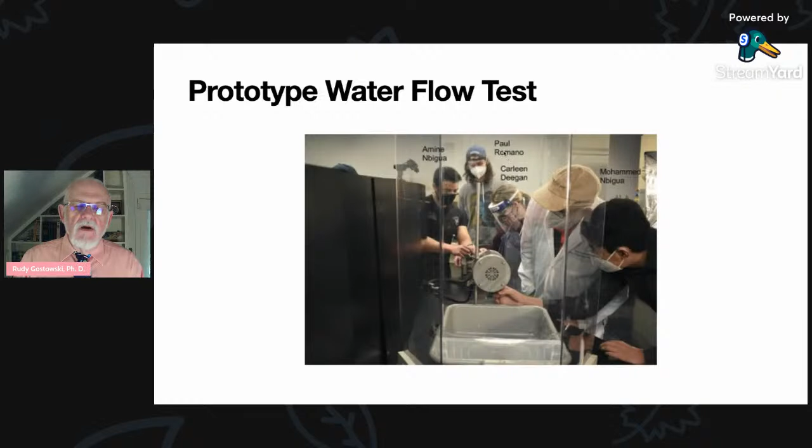And then this was our water test, which did not work, unfortunately. There's some of our different people. Amine did a lot of this work here. His brother, Mohammed, did a lot of work. Carleen and Paul, and there's other people that just were not in this picture. After we did our water test, we were wondering why it leaked. We were able to find where the adhesive did not actually fill in, and that's why it leaked. Not anything real amazing there.

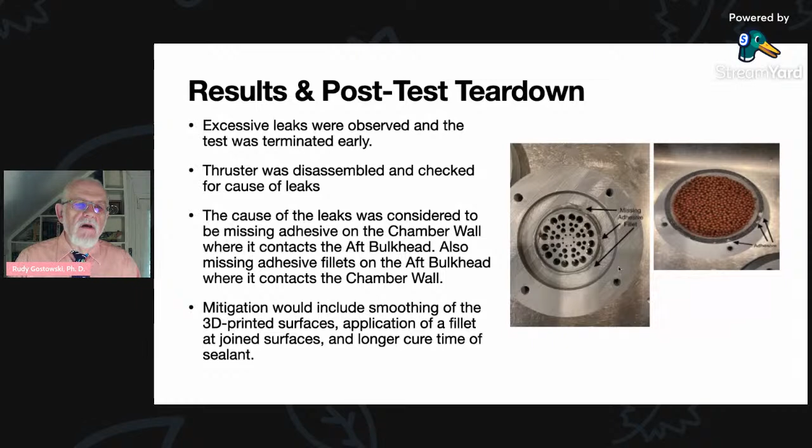And so what we have left to do is quite a bit. We want to model the flow and the physics using Fusion 360. We want to convert the catalyst pack into CNC files so that we can use computerized control machining, and we need mechanical drawings of this because the person that controls our access to the milling machines insists that she have mechanical drawings first. We're going to fabricate a catalyst pack from 316 stainless steel, design and construct our test stand, enrich 35% peroxide to 50, going up to 98%.

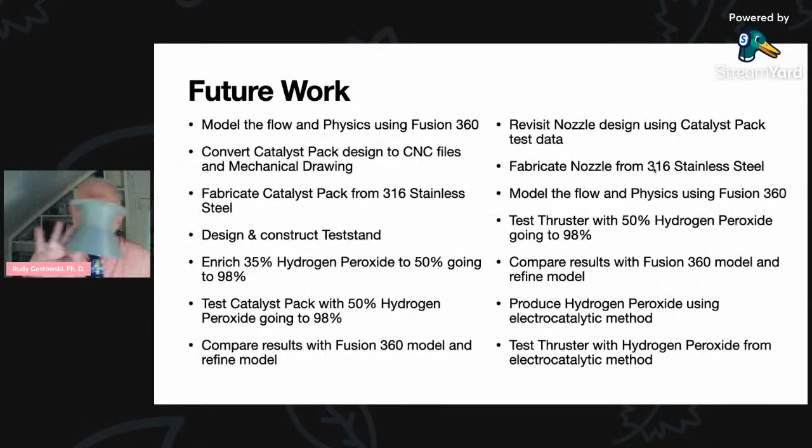We'll test the catalyst pack with those peroxides, compare the results to the physics model that we get in Fusion 360, possibly do a refinement of our model. We'll revisit the nozzle design using the data we get from the catalyst pack test, fabricate the nozzle from our stainless steel, model the flow and physics again, test the thruster with the nozzle this time, compare the results to the model, and finally produce hydrogen peroxide using the electrocatalytic method that we're proposing could be done on the moon and on Mars, and then test it with that peroxide.

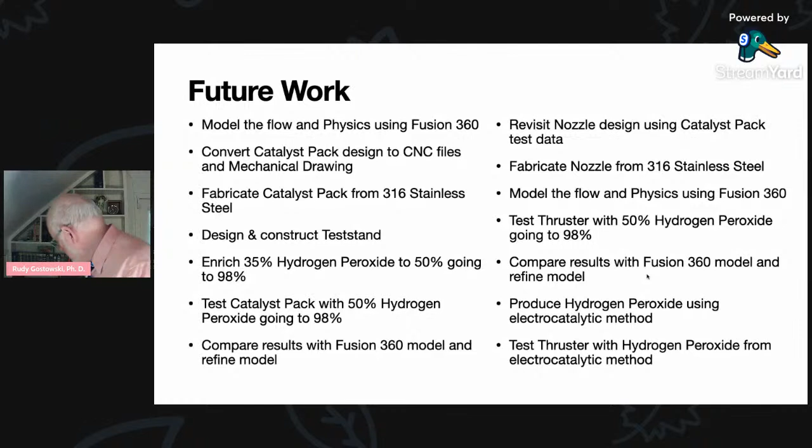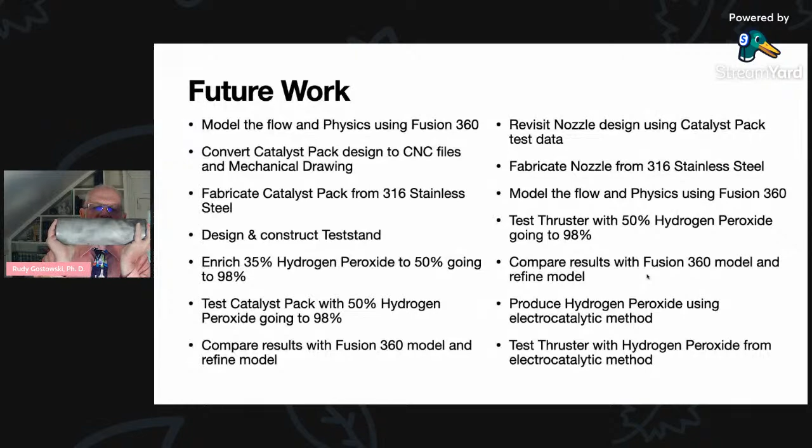I know it's the same stuff, whether we buy it or whether we synthesize it, but people at NASA want to see us actually take it through the entire process. Now on the machining, the catalyst pack will be machined from this piece here. This is about 25 pounds. This is 1 foot in length. It won't be a foot, it will be more like 4 inches. The bulkheads at the ends, in other words, these pieces will be fabricated from these pieces of stainless 316 metal.